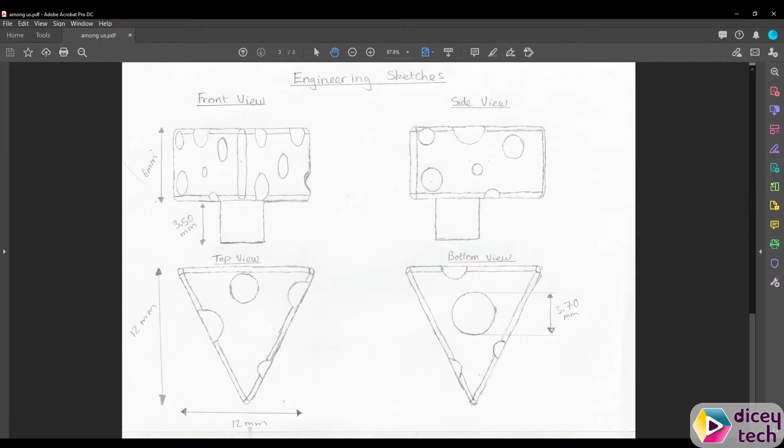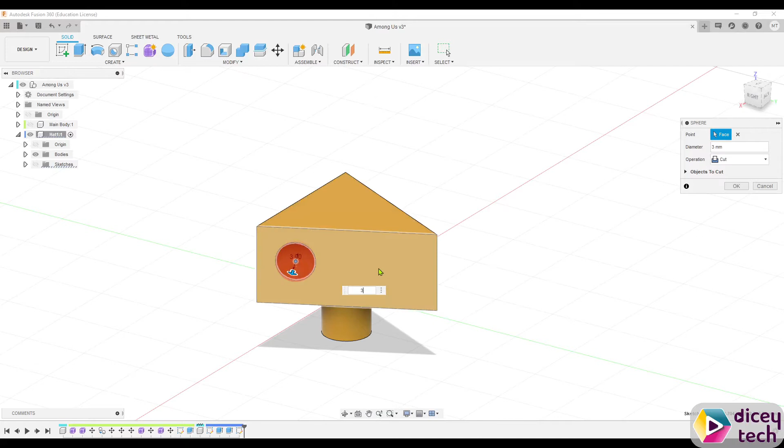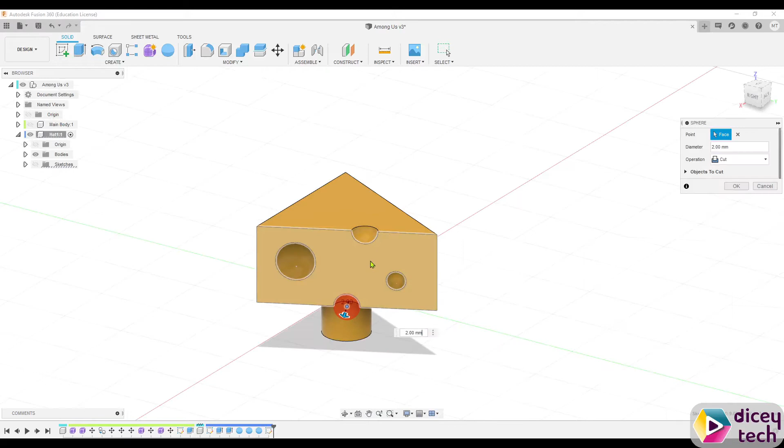Go into Fusion, go to Create, down to Sphere, and click on it. Click on one of the faces. Select anywhere, and these can be random sizes. I'm going to do 3. Press Enter, then repeat the process. Here, maybe 1.5. So that's the first side, and you want to do this to all of the sides.

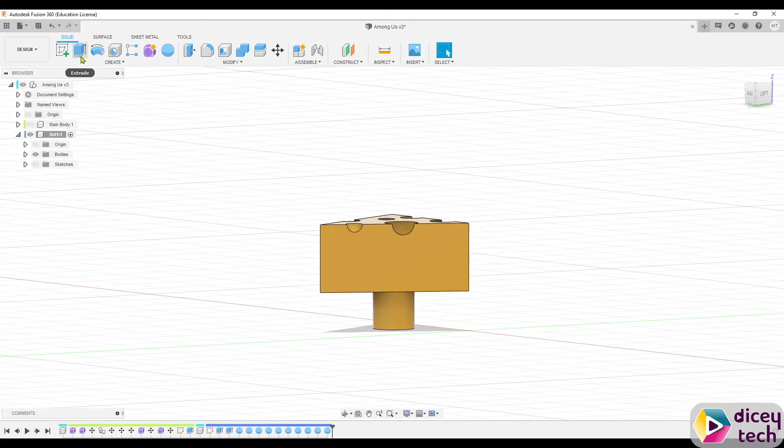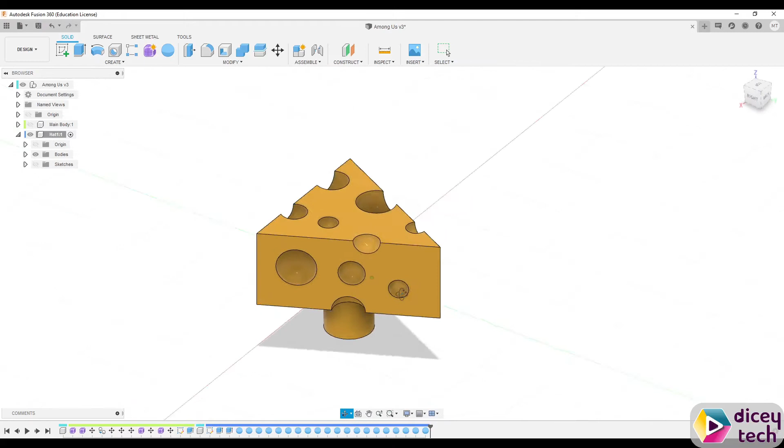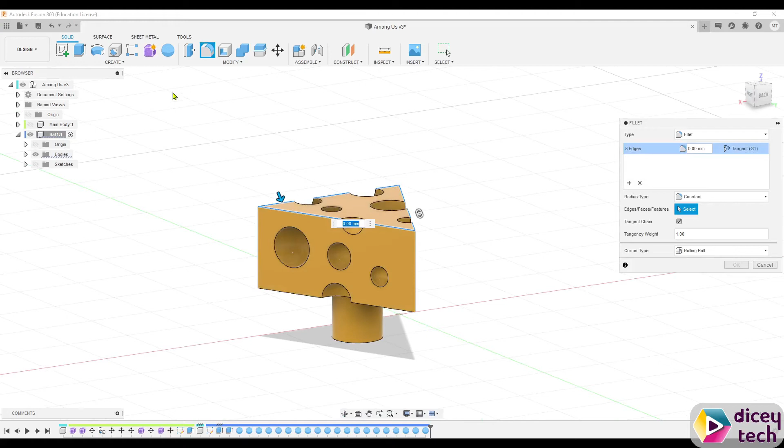Once you're done with all of that, go to Fillet, which is right here. Click on the corners. Here, there, there, and there, and all around. What fillet does is it rounds your edges so you don't get sharp edges like these.

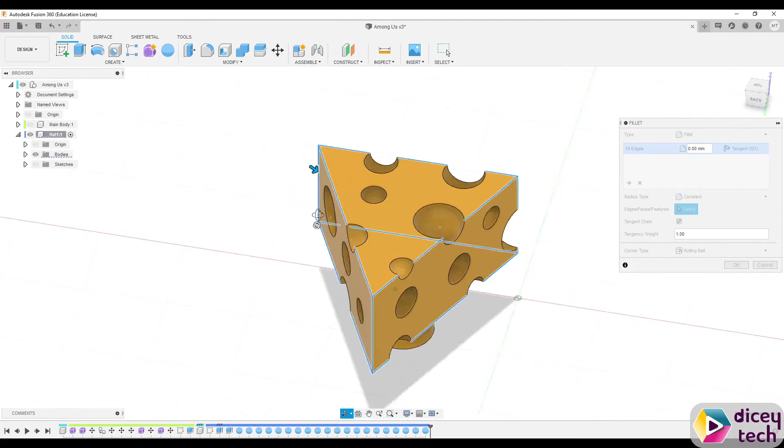You want to go all around to get rid of all of them so this way you don't get cut. Once you have all of the sharp edges selected, make it 1. If that doesn't work, go down lower, try 0.5, 0.3, maybe 0.4. Seems that 0.4 works, then press OK. You should get something like this.

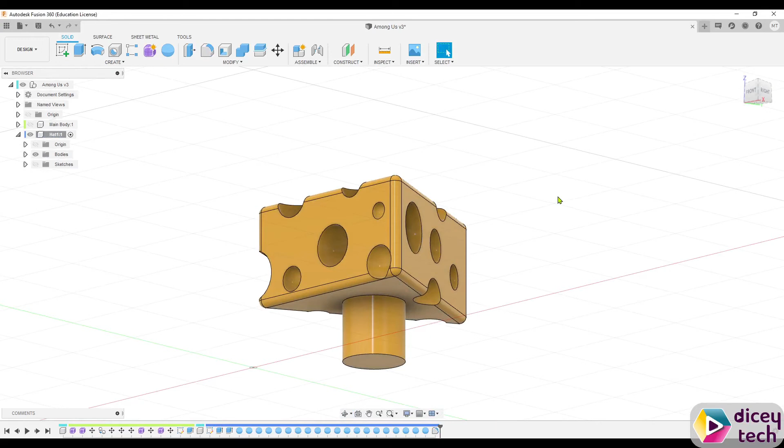Once you've done that, press Save. Then make main body visible. Go up here to where it says Assemble and go to Joint.

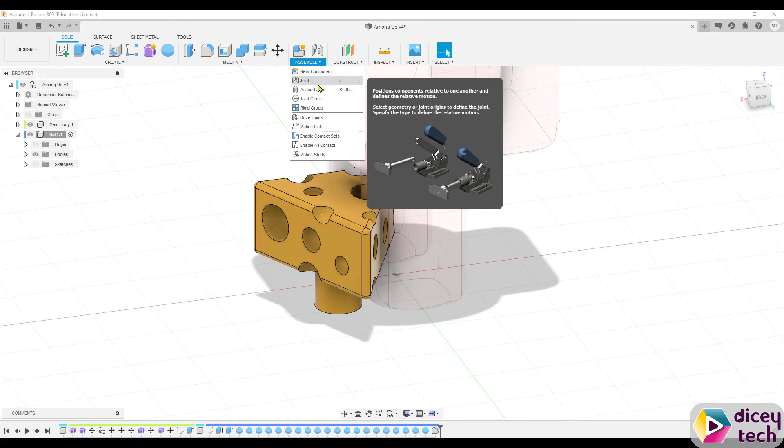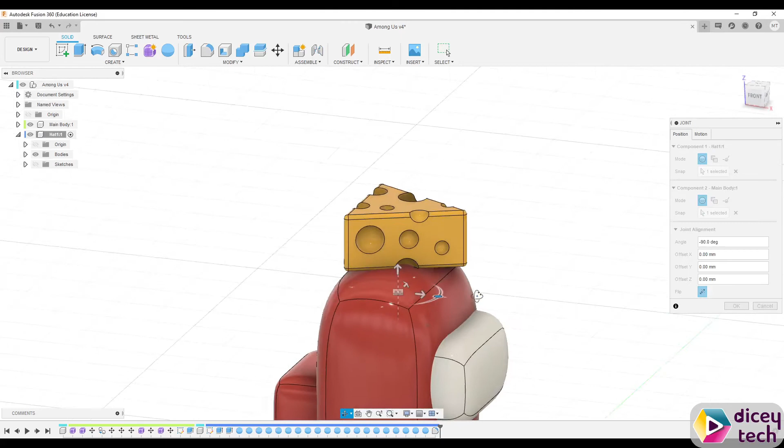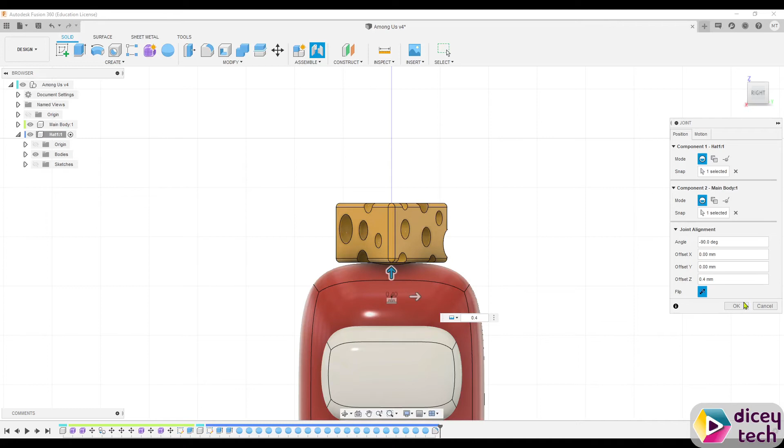Select the bottom of your hat and go up and select this hole right here, like that. Then rotate it by 90 degrees, like this, so that it's straight. Maybe lift it up slightly because it's touching, so maybe by about 0.5, maybe lower, 0.4. That should be fine. Press OK, and there you have it, your Among Us character done.

To finish off, save your work. You want to export all of these as STL files individually. So right click on this, main body, go down to save as STL.

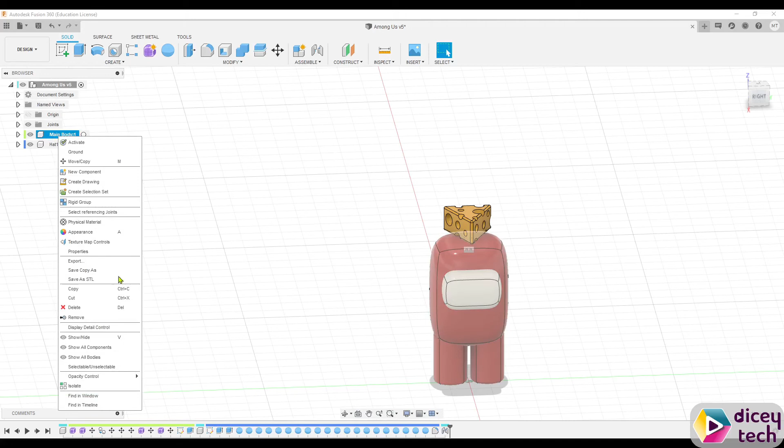Make sure refinement is on high, press OK. Then you can save it on your desktop, as Main body Among Us. Save.

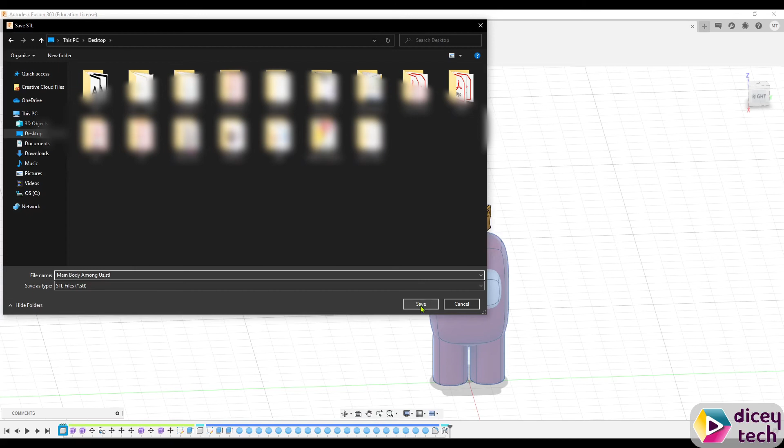Then save the hat, as Hat number 1 Among Us.

So why do we do them separately? This way, when you print them, they don't print together. That way you can change your hats easily.

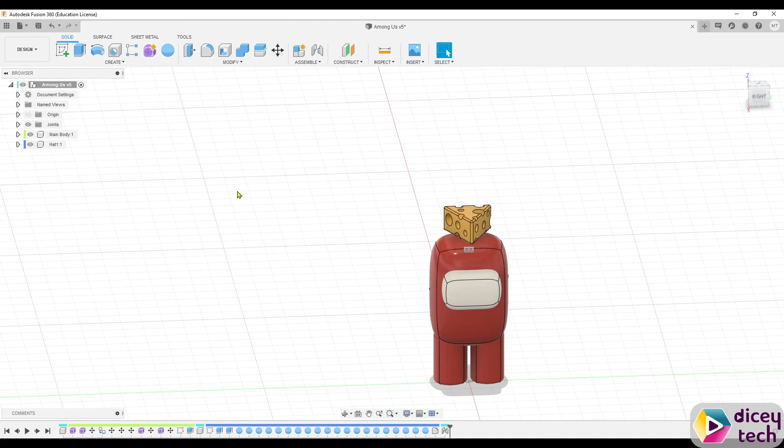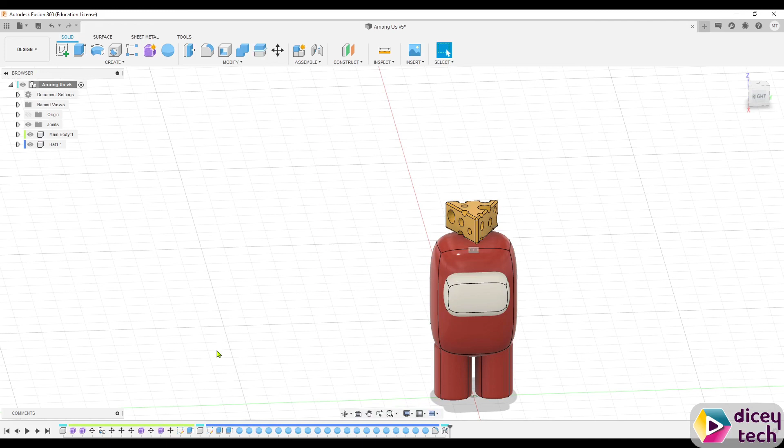So now if you want to make another hat, you can always right click here, new component, and create a new hat. If you want to print out your work, you can either send that to your printer and print it out, or if you don't have one, you can always use a service, Makerverse, where you upload your work onto there and then you pay for the quote and they will send your design to your house. And we're done.